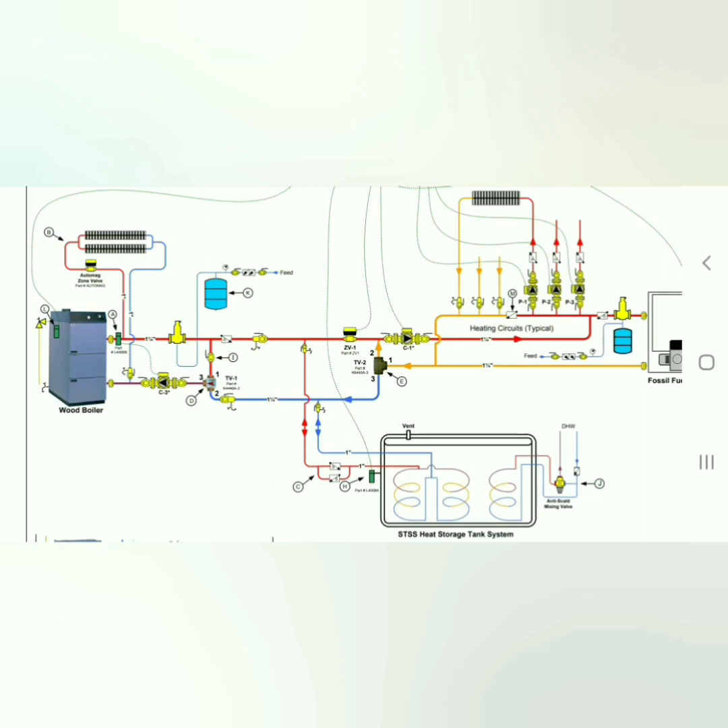Essentially, here's the wood boiler, and it has a circulating pump right here. That circulating pump comes on once the water jacket in the boiler reaches 150 degrees, and it'll circulate the water so you don't have uneven heating in the boiler jacket.

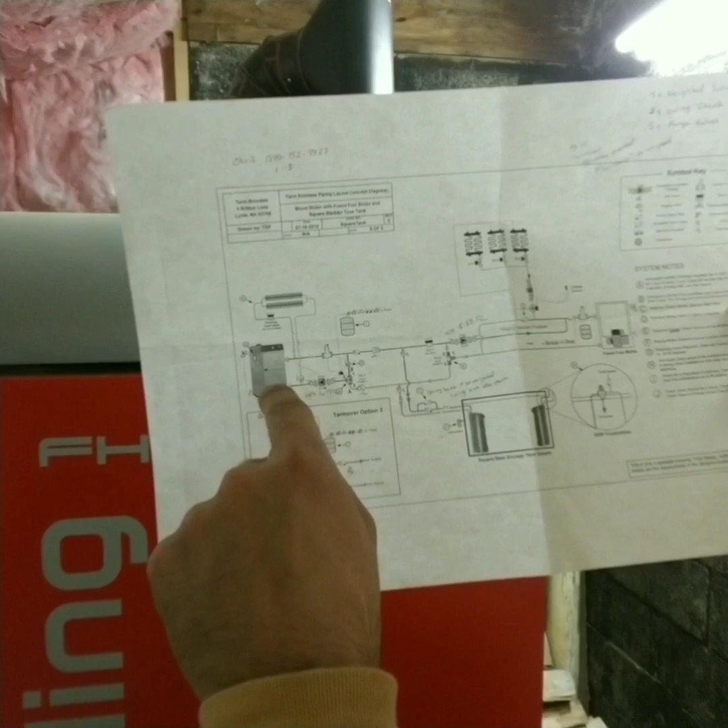That is an emergency dump zone. If you lose power, this valve automatically opens. So if you have a fire going and you lose power and the air vents don't shut, the boiler won't overheat. It has a big enough emergency dump zone that it dissipates all the heat. That's inside the house. I'll show you that later.

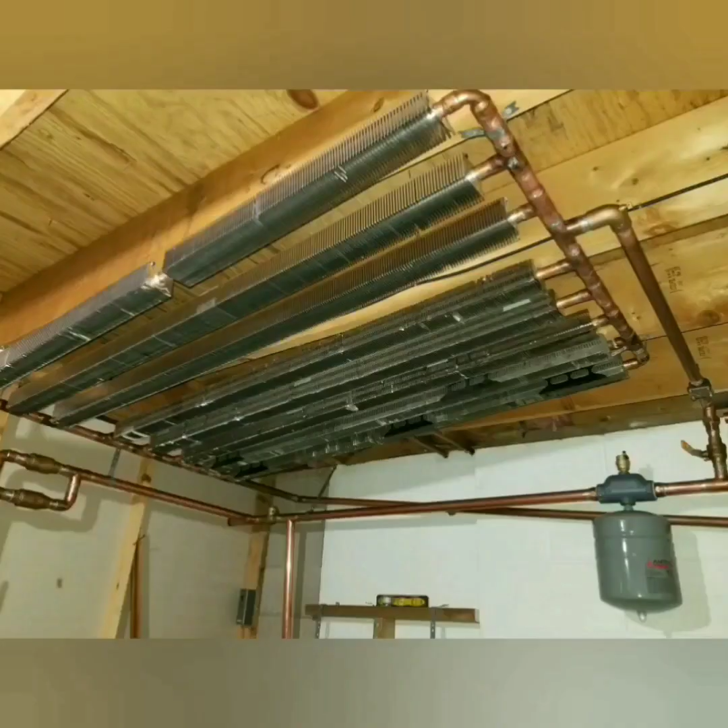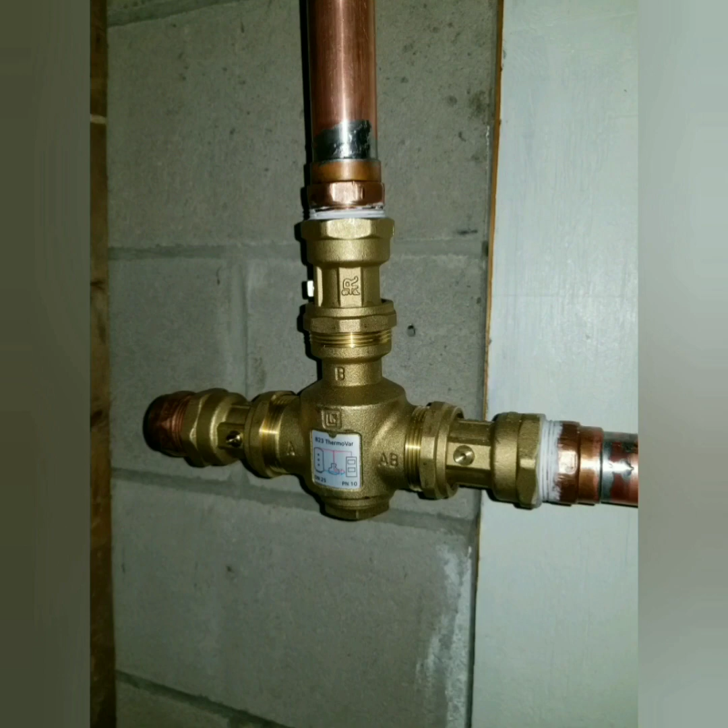So at 150 degrees this pump turns on and it circulates right here through this area. The reason it does that is because this valve right here is like a thermostatic valve, just like the thermostat in your car. It will not open and allow any of the flow to go anywhere but back to the boiler below 150 degrees.

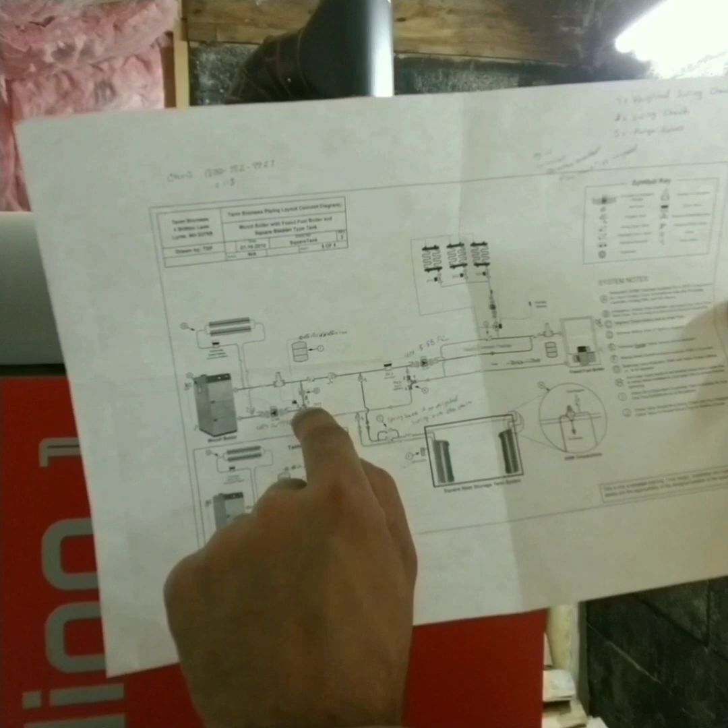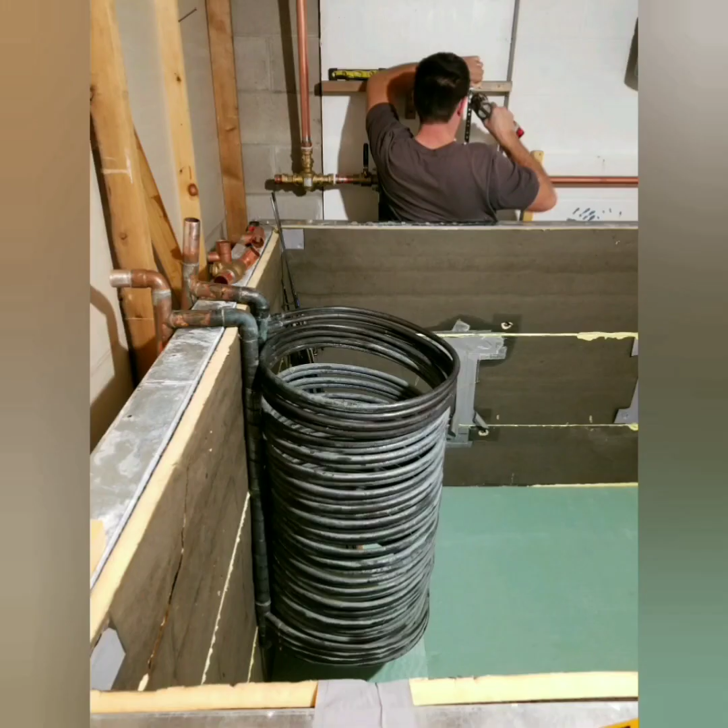Above 150 degrees, this opens. What it does is it shuts off number 1 and opens number 2. So flow from the boiler can now go over here down into this coil, which heats the storage tank. And then the cool water returns back through this valve and into the boiler to get reheated. So that's pretty much the boiler and how the storage tank works and how those two interact.

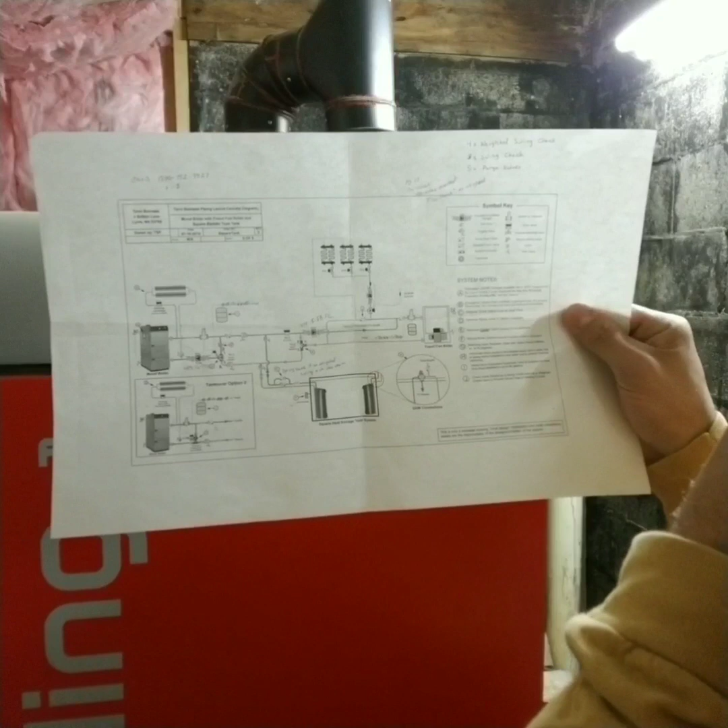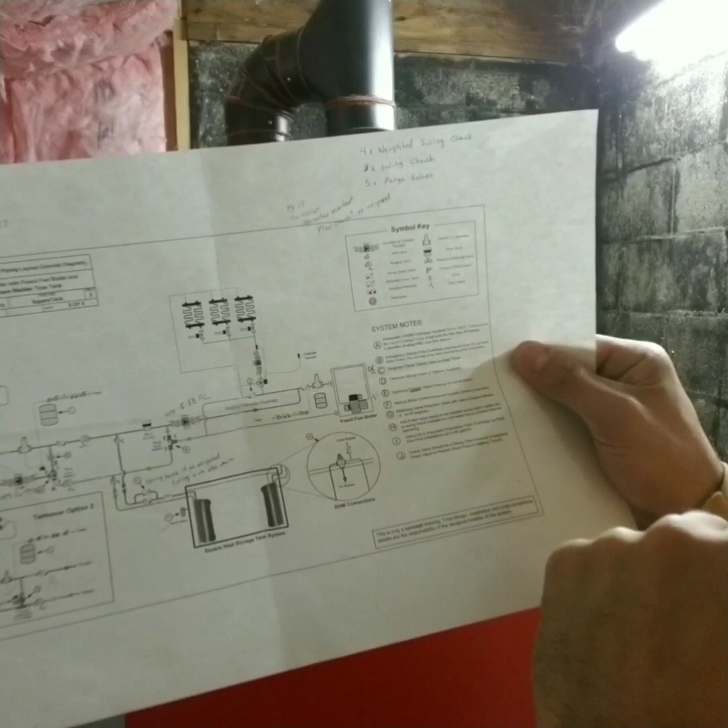Where it gets interesting is when you have a fire, you're charging the tank, and then the normal controls in the system, your thermostat up in the house, like this represents one of your zones, say your kitchen or living room, dining room, one of those areas calls for heat. What happens then is it opens up this zone valve and it turns on this circulator.

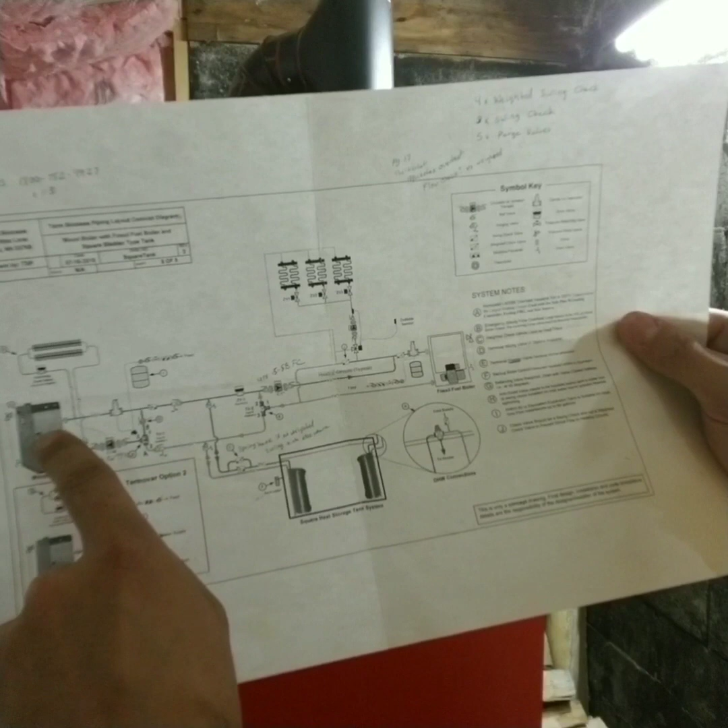Now if your fire is still burning and your water jacket's above 150 degrees, this circulator is still running. So you've got hot water from the boiler now serving whatever demand is in the house. Instead of going back to the tank to charge it, flow is diverted through the zone valve, through this circulating pump, and out to your main header. And then if you have an individual pump for your zone, it pumps the hot water to your zone.

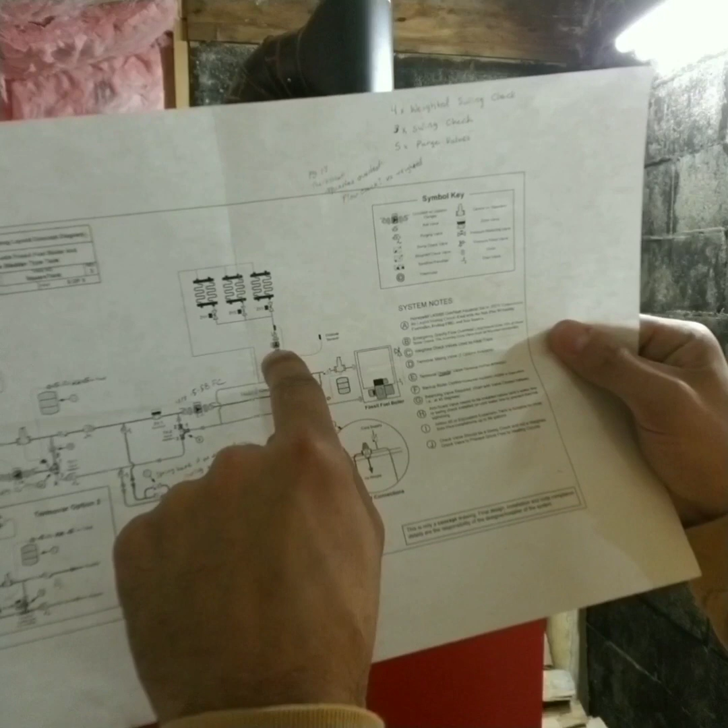Now the boiler's output is around 185 degrees. That's like an ideal baseboard water heat system. If you've got in-floor heating, it's going to be much lower temperature. I'm not going to go into that. So your heat goes out to your loop and it circulates.

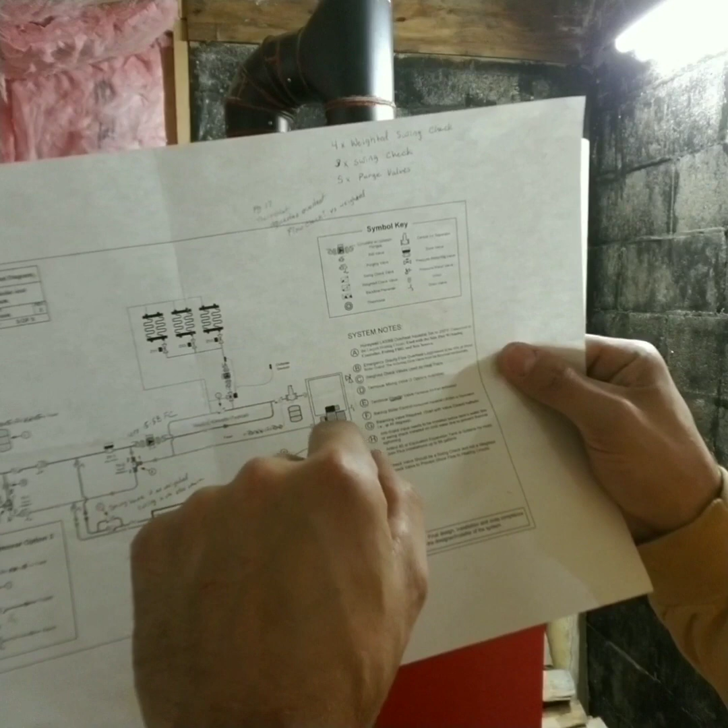The interesting part about this system is after it goes through and gives off the heat, it comes back here. That's a check valve. It can't go back that way. It's forced to come down here. It comes to this valve, which is basically another thermostatic valve.

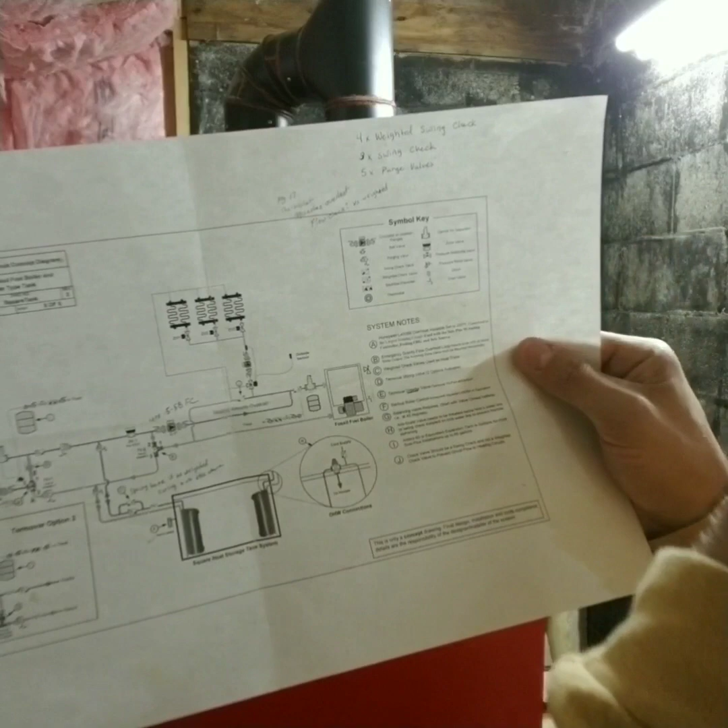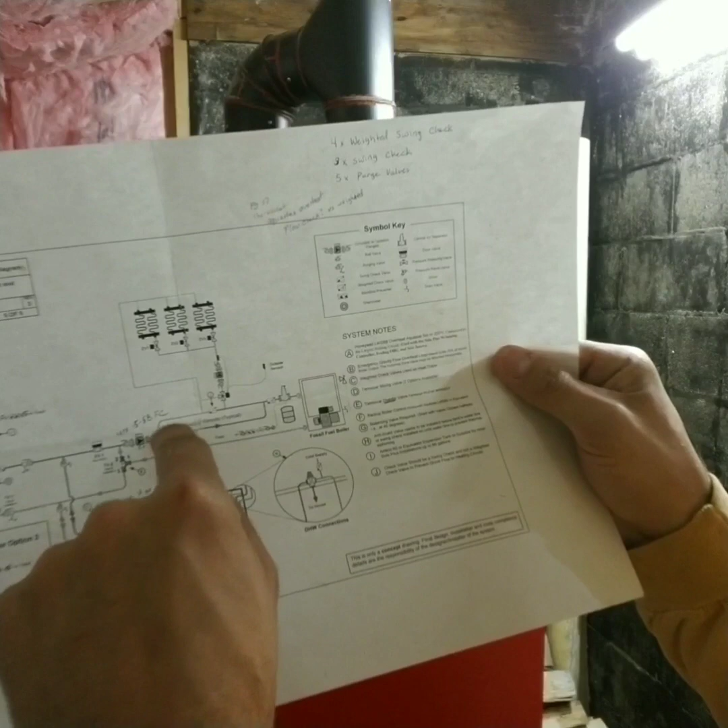For this valve, if the water coming back is above 165 degrees, it gets sent back this way and back around for another ride until it's lost enough heat and it's below 165 degrees. Once it's below 165 degrees coming out of this zone, it comes back to this valve, and it's going to divert it down this way and back to here.

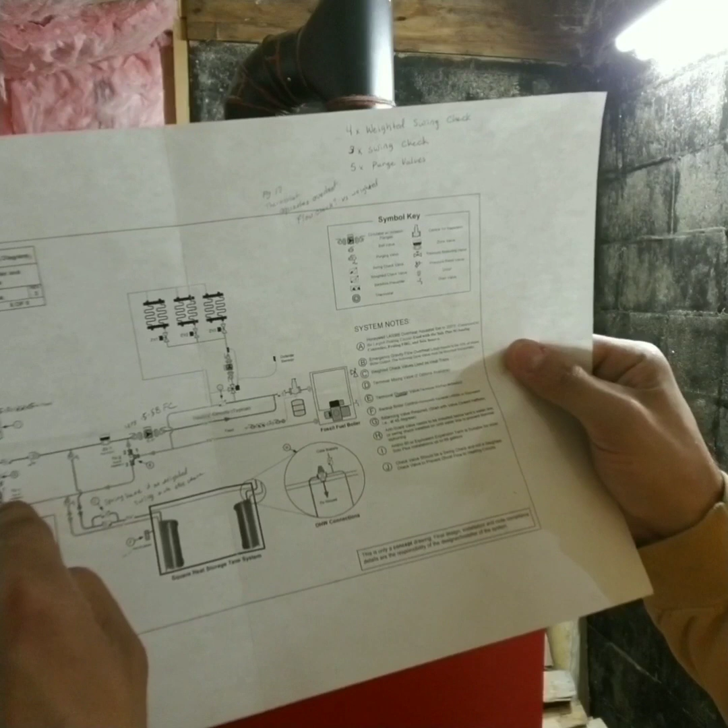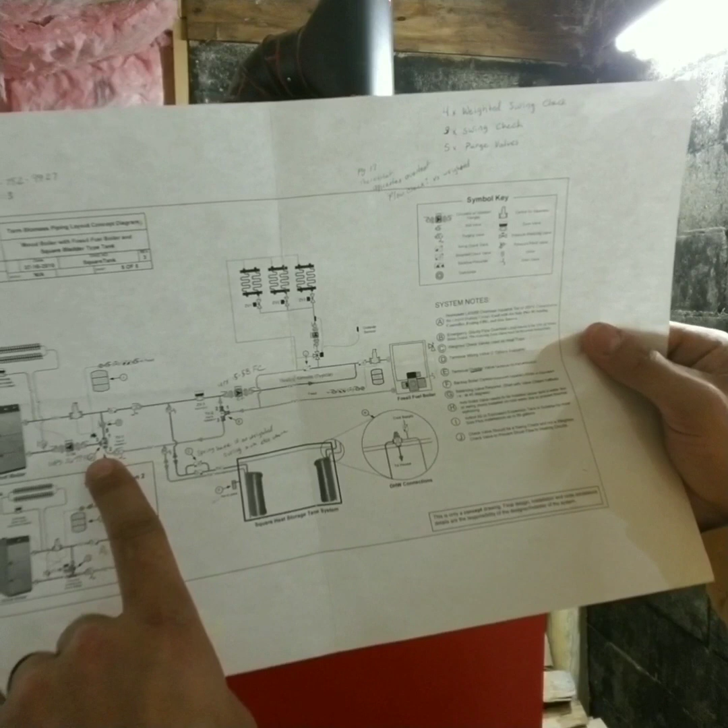And this valve may mix it so you always have 150 degree hot water coming back to your boiler. That's the key part of this valve right here: it's a minimum temperature protection for the boiler. You always have hot water coming back to the boiler at 150 degrees. That prevents creosote and corrosion in the boiler. So that's basically it in a nutshell.

Make sure you're seeing this. Hopefully it comes out well.

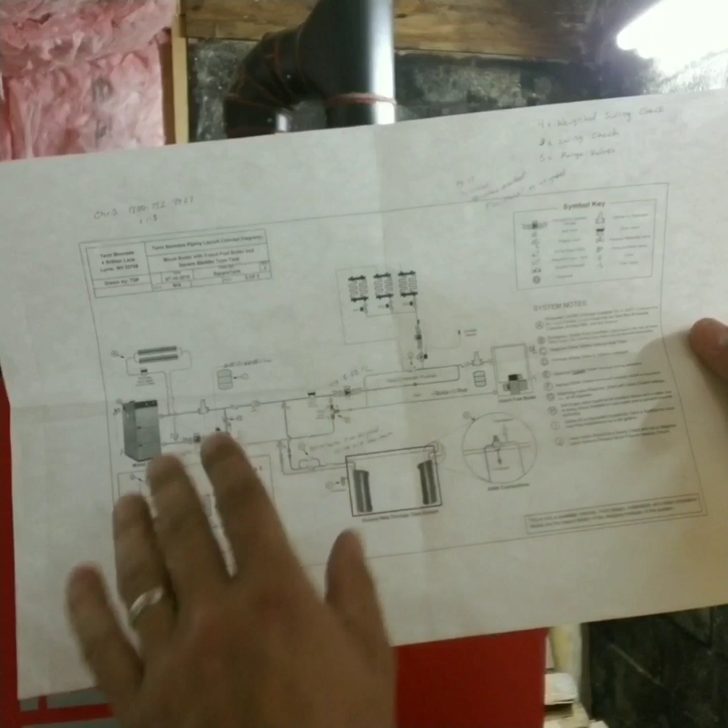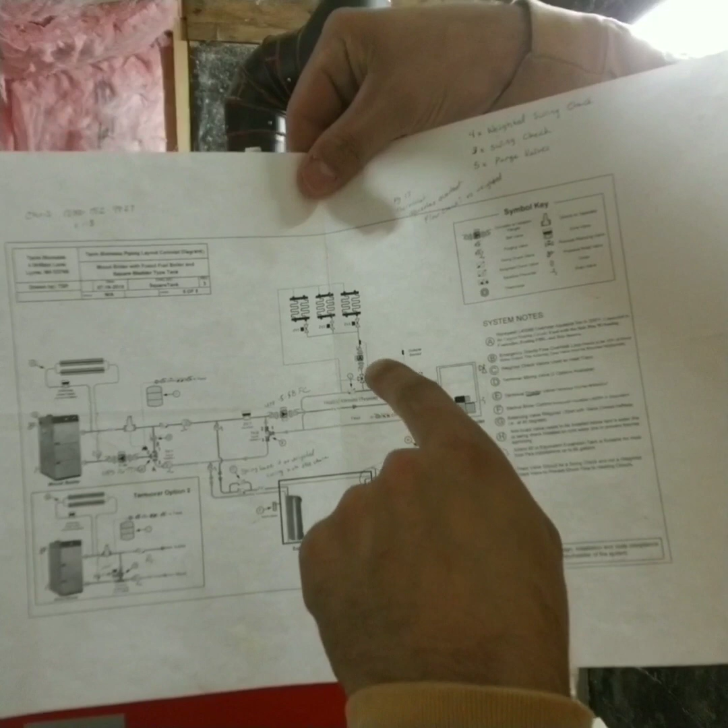So that was the scenario of a fire going in the boiler, a zone calls for heat, and what happens in the controls. The other times the system calls for heat, you may not have a fire going in the boiler. In that case, your zone calls for heat. This pump turns on. This pump turns on.

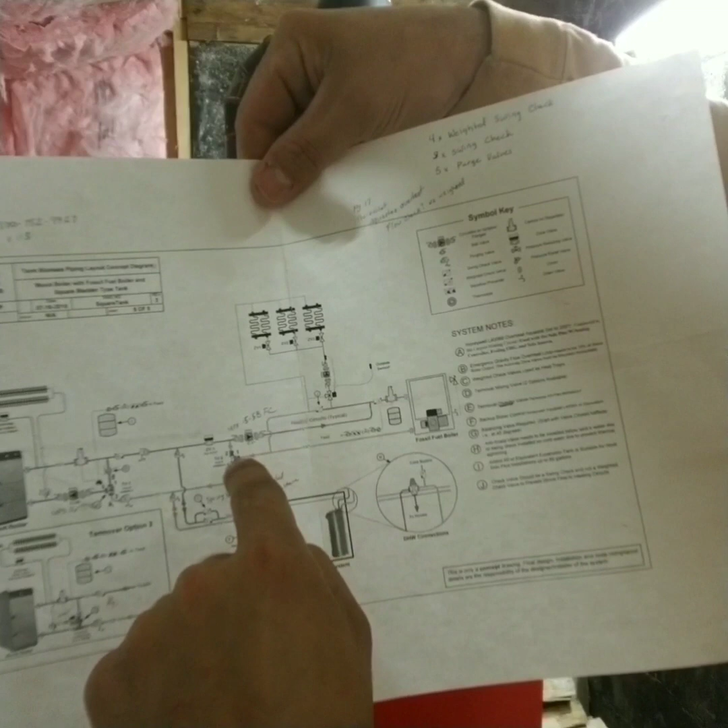Your zone valve opens. And because this pump is not running at the boiler, no water goes back to the boiler. Water comes from your zone through this valve. It's less than 165 degrees. It comes down here. It goes to the tank, goes into that heat exchanger, gets heated back up, comes back up this way through your zone valve, back through that circulator, and out to your zone.

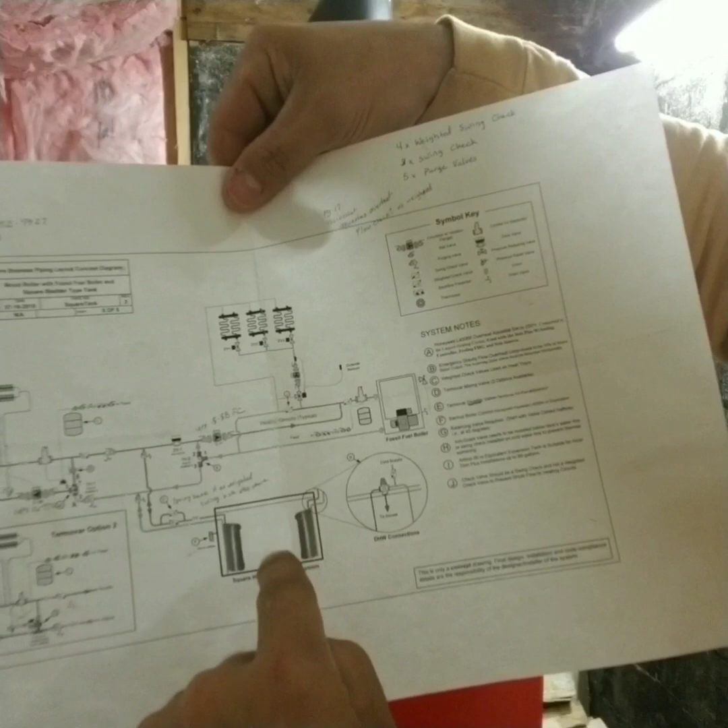So this heat exchanger in the tank works both ways. It heats the water in the storage tank, and it also removes the heat from the storage tank. And it does that because it has two check valves in the one line right there.

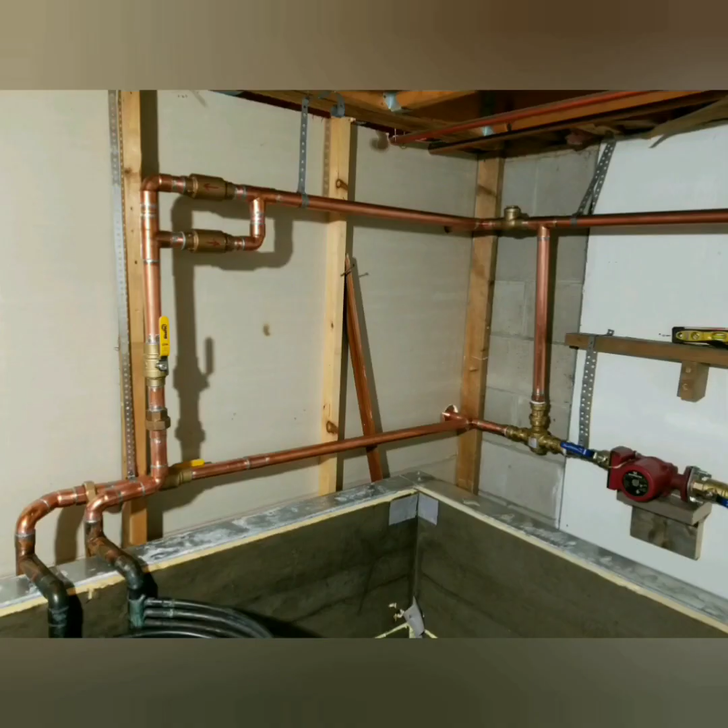I used all 1 1/4 inch copper tubing. The straight copper, even though it's expensive, is dwarfed by the cost of the fittings. Why did I do copper? It was recommended by the boilermaker and everybody else I talked with. You can use PEX, I'm sure you can. I don't know what the upper temperature rating is of PEX, but copper doesn't lose its value. And in my opinion, it's a longer-lasting, better, reliable product. So I did everything in copper.

I'm getting ready to fire this boiler. I'll give you a quick rundown on the lighting process and demonstrate how easy it is to use. There are other gasification boilers that boast a pretty good efficiency rating. It's my opinion this is one of the best, top two. And the one thing that makes this, in my opinion, the best boiler is the user interface and how easy it is to use. When I purchased this boiler, one of the major factors was ease of use.

I need something where my wife's not intimidated to come down here and light the boiler and heat the house. I also want something that's efficient and easy to use. It's primarily two things. Of course, budget's always in there, so everybody's budget's different. So, that being said, I'll load it, I'll start it, I'll show you how easy it is. I'm going to show you some of the controls, and we'll go from there.

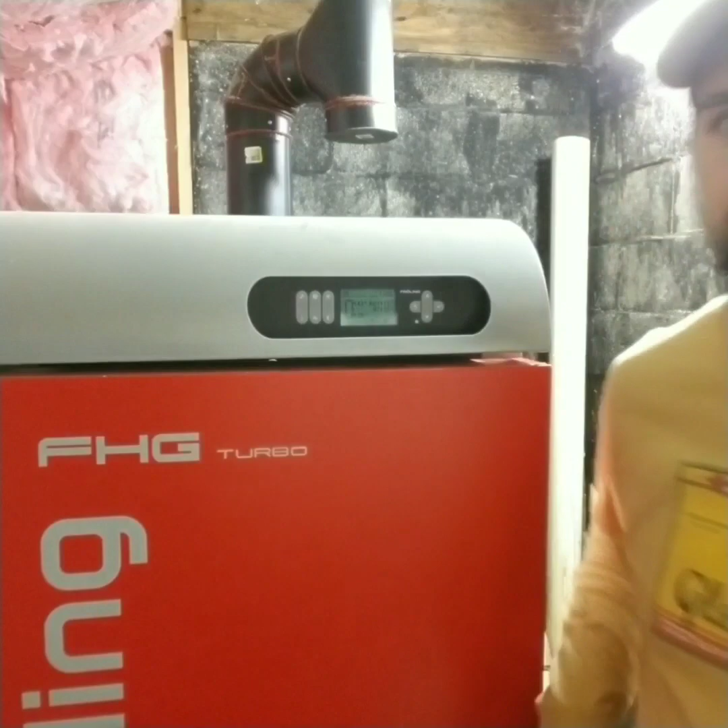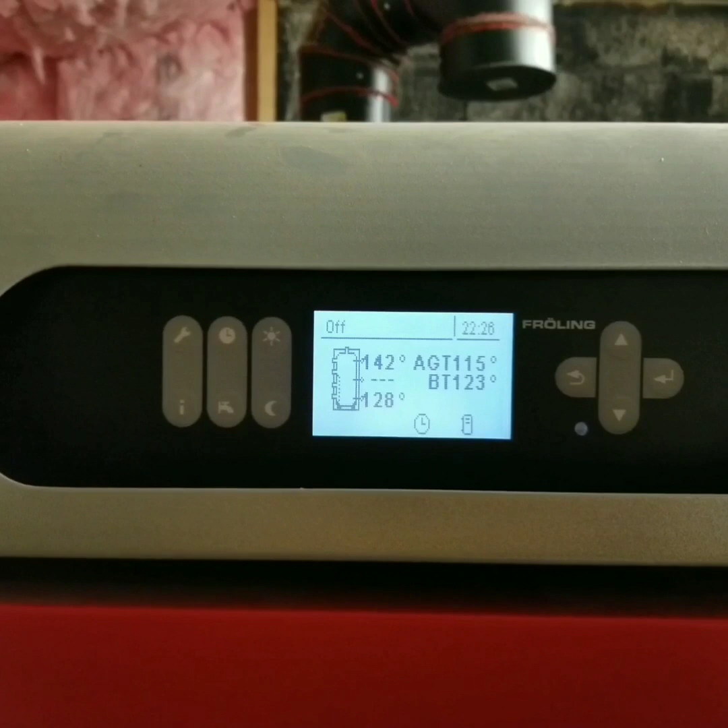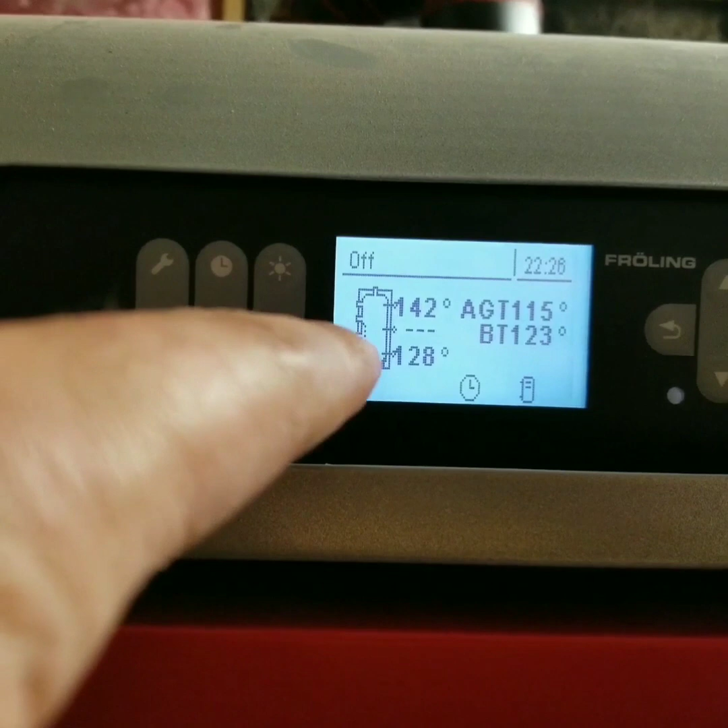Okay guys, this is the control panel on the Froling FHG. This boiler's got 105,000, I believe, BTU per hour output. On the control panel, you'll see a couple of numbers. The ones on the left are the storage tank. You can see the upper tank temperature is 142 degrees. The lower temperature is 128.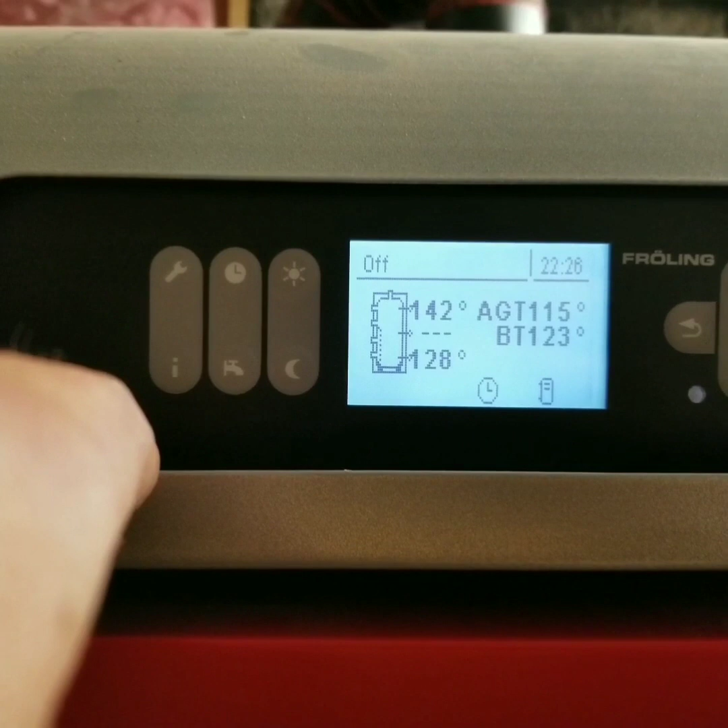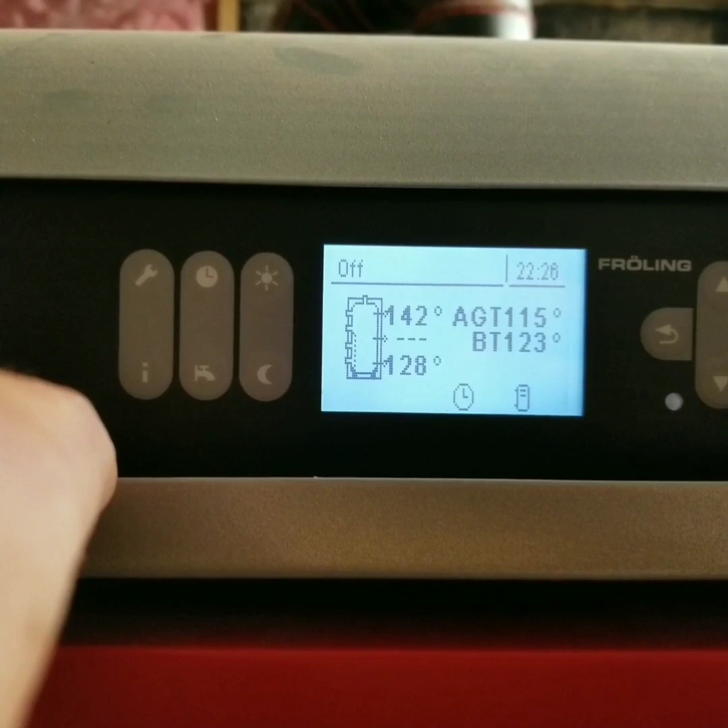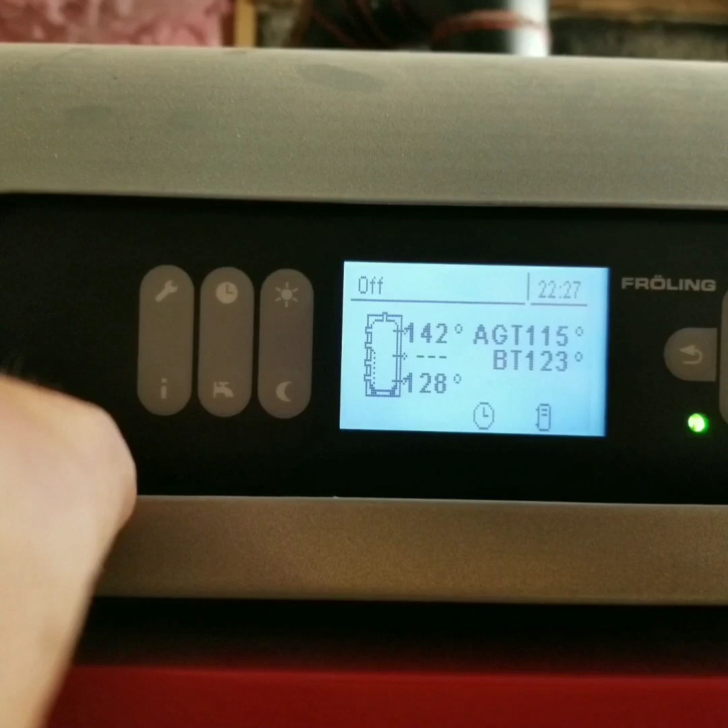In the worst parts of winter, I try to recharge the storage tank when it hits about 150, 155. And that's primarily because your baseboard heaters, the emitters, are a copper tube with aluminum foil fins on them. They really start to lose a lot of efficiency below 160 degrees. If it's 10 degrees below zero outside with a 5-mile-an-hour wind, 150 degrees is going to be about your bare minimum. If you've got in-floor heating, PEX, or in concrete or what have you, your lowest usable temperature in your storage tank is going to be much lower. In-floor heating is usually sending around 110, 120 degrees out through your floor.

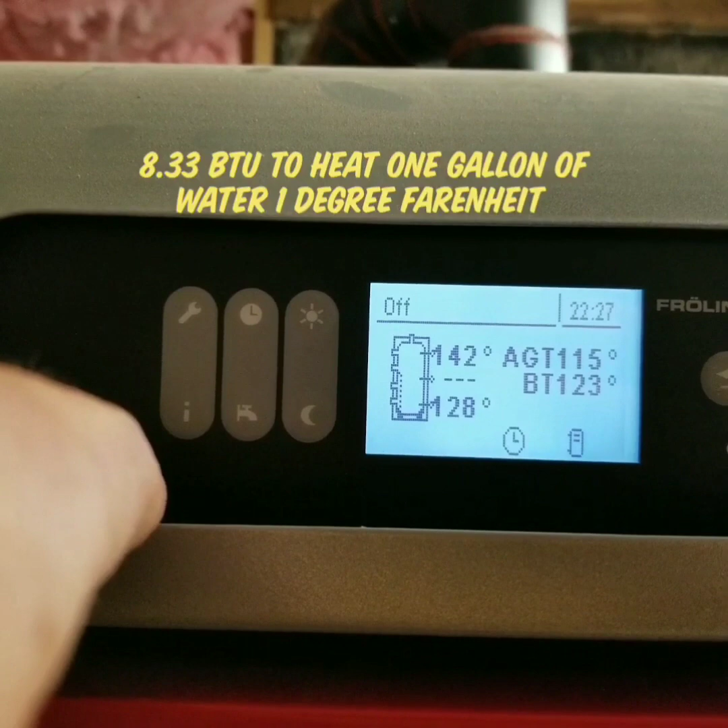So if you think about it, my max temperature is 180 in my storage tank, and I recharge it at, let's say, 140. That's an even 40 degrees. 40 degrees of differential temperature over 820 gallons. I could do the math and show you what that looks like in BTUs. And then let's say you use that over a 12-hour period. Now you know how many BTUs per hour my house would use.

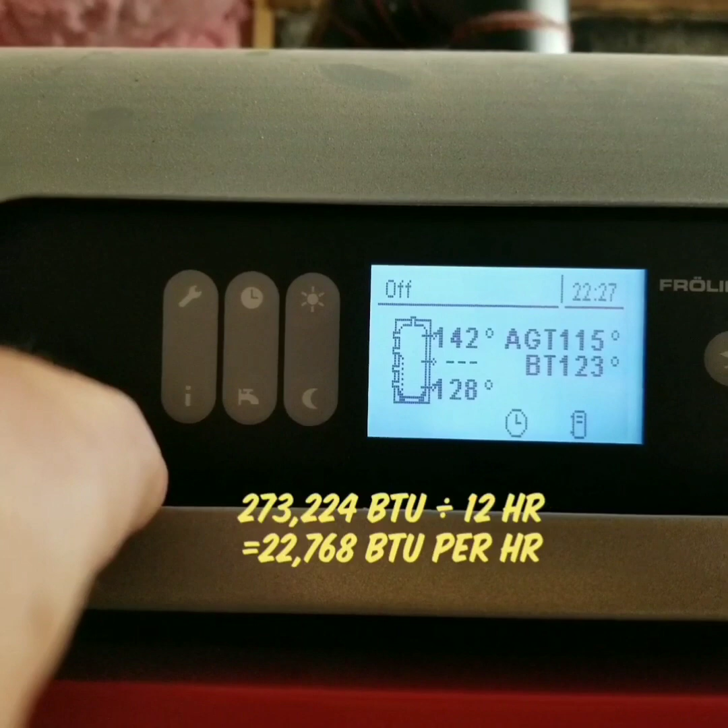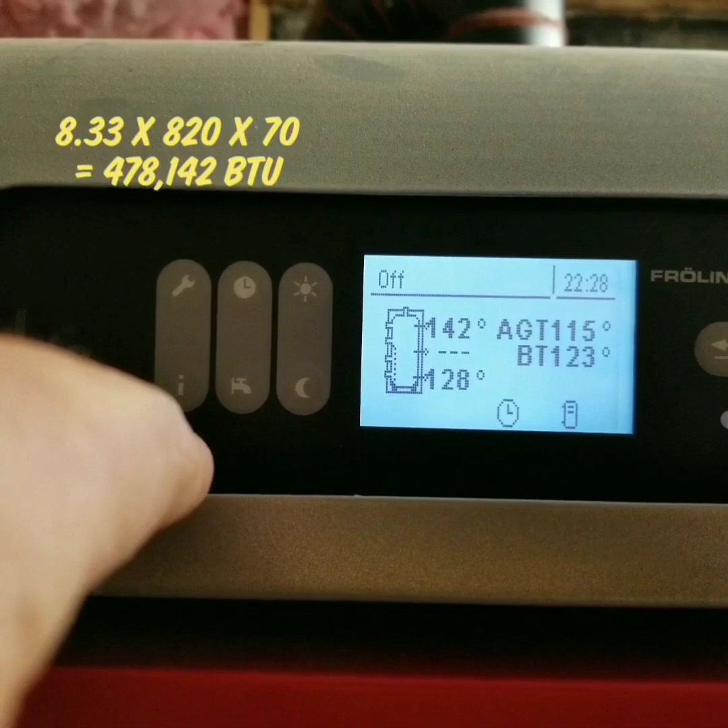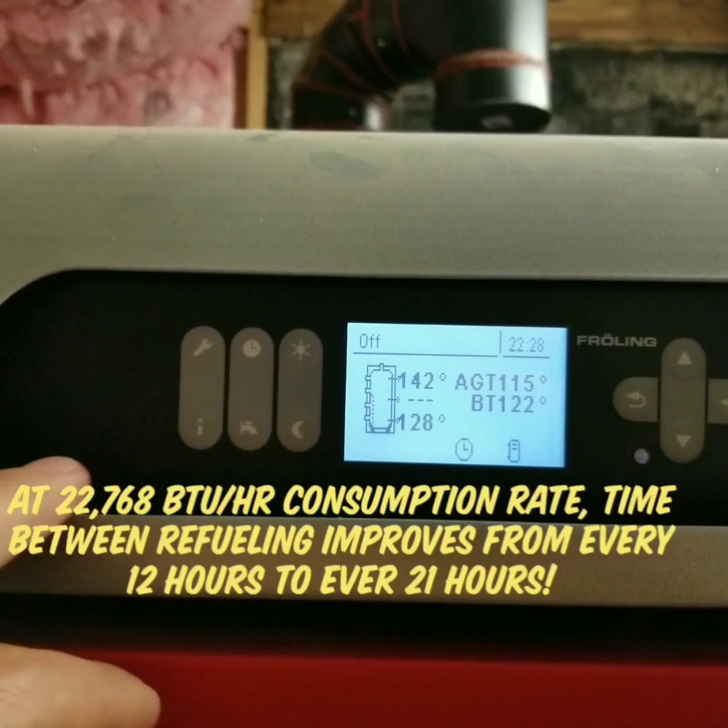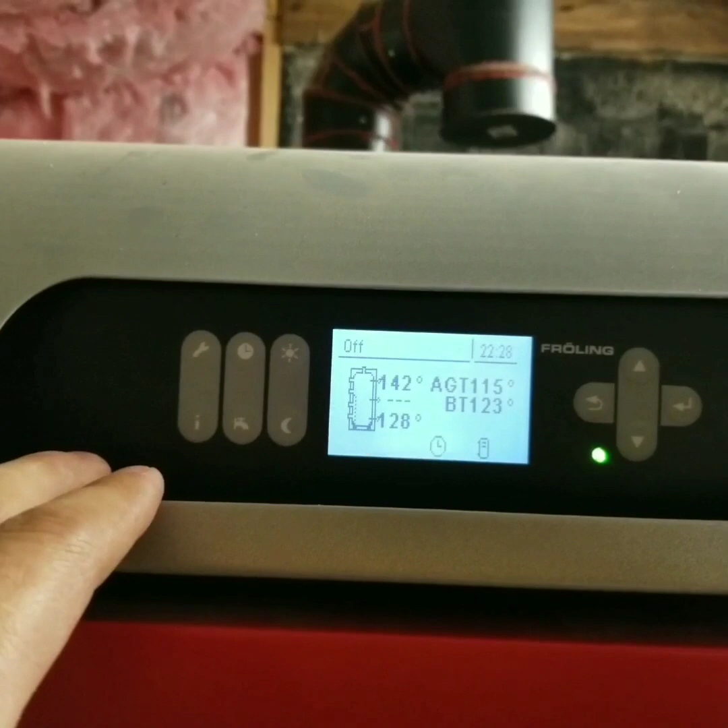If you've got in-floor heating and you can draw this tank temperature down to 120, 110 degrees, you just picked up 30 more degrees of differential temperature over that same volume. You've basically doubled your heat storage. So for you guys that have in-floor heating and you're thinking about doing a boiler, definitely consider one with a storage tank. Doesn't have to be this boiler, but a gasification, what they call batch burn boilers, and you'd be surprised how long you could actually go without reheating.

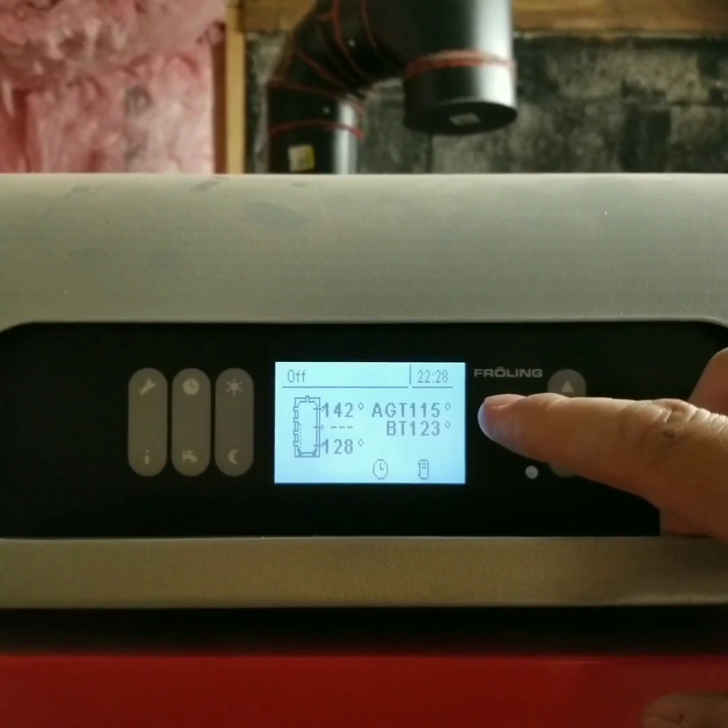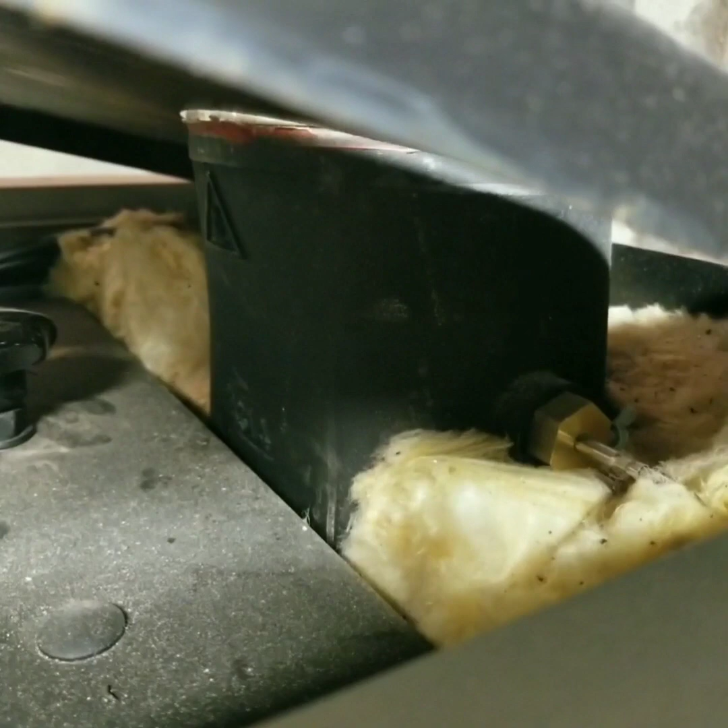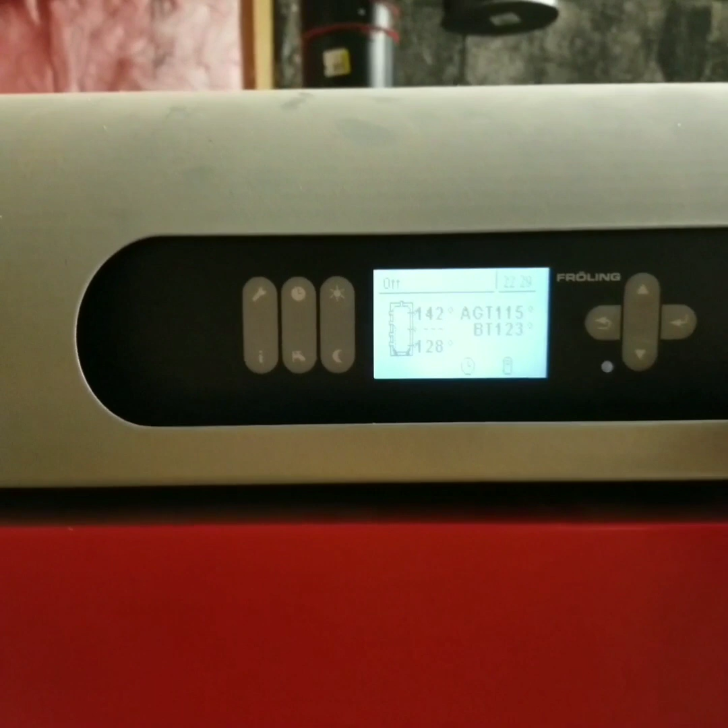All right, enough rambling. The number in the top right, AGT, average gas temperature. So there's a temperature element in the flue for the chimney. Can't really see it. Okay, that little brass plug right there, that's the temperature probe. There's also an O2 sensor, just like your car has, and it's measuring the residual oxygen, and it's adjusting the air dampers to meet whatever program criteria it needs for optimum burn.

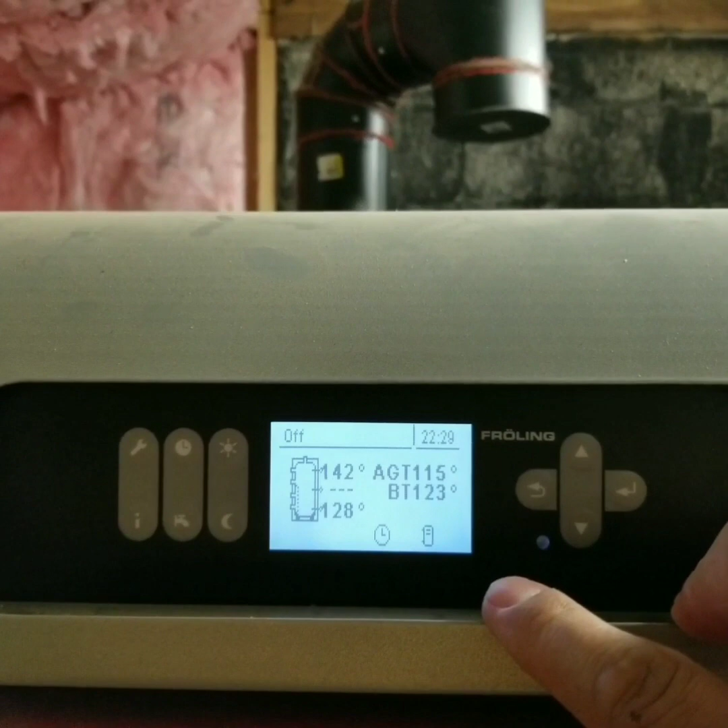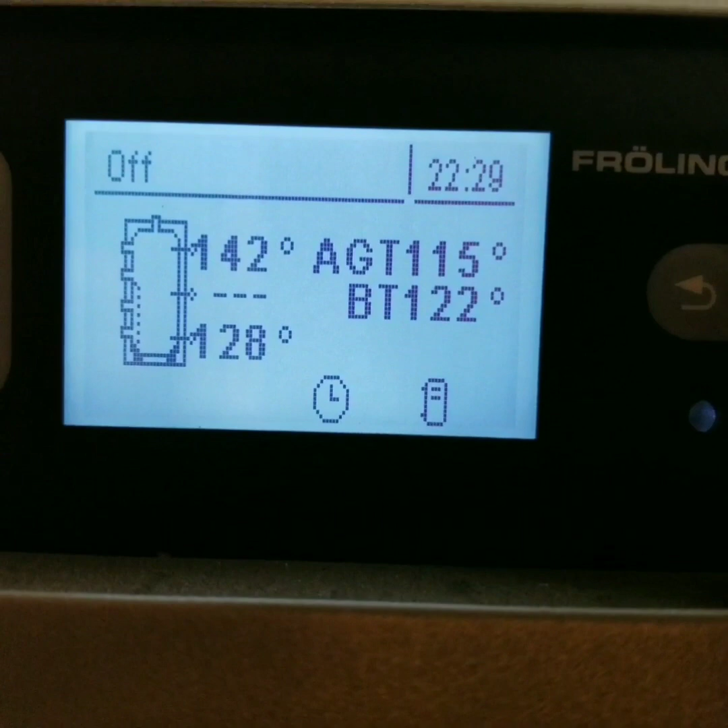The lower temperature is your boiler jacket water temperature at 123 degrees. Interesting thing about this boiler is that little thing right there represents the storage tank, and it's telling me it's approximately half full of energy. Now the other unique thing about this boiler is it has the ability to calculate, based on your storage tank size and what the temperatures are in the tank, how much wood you should load in this boiler. Of course, those numbers are based on the storage tank the company designs to complement this boiler. If you're using a storage tank other than what they sell, your numbers are just going to be an estimate.

But really, it's like any other machine or wood stove for that matter. You kind of get the hang of reading the tank temperatures, looking at the weather, gauging how much wood you need to load in it for the day, and you can just look at the temperatures and know you don't really need that calculation to tell you how much wood. But it's on there, so it does help a little bit because it's pretty consistent day to day, depending on the weather, how much you're going to load. If it's really cold outside and your house has got a high demand, you can get away with adding a little more wood into the stove because ultimately the house is going to take some of that heat during the recharging of your storage tank.

So you can tend to put a little more wood in there. But you don't want to go too much because it'll put the machine into slumber mode, which is kind of like a smolder mode, so to speak. It's going to keep the wood burning, but it's going to choke the air off. You're just going to waste fuel. You can create creosote, but ideally your wood's dry, 20%-ish, 20-24%, and you're not going to see much creosote. So I haven't seen any with mine.

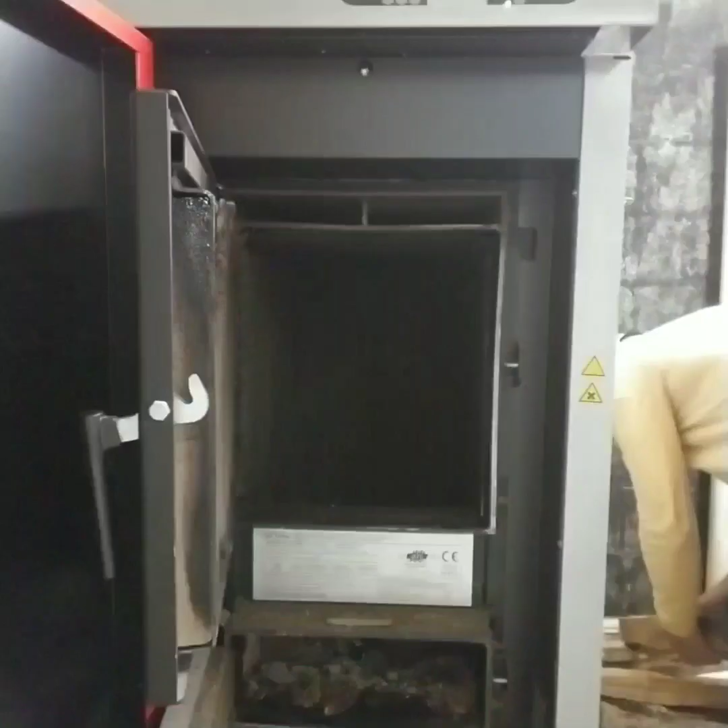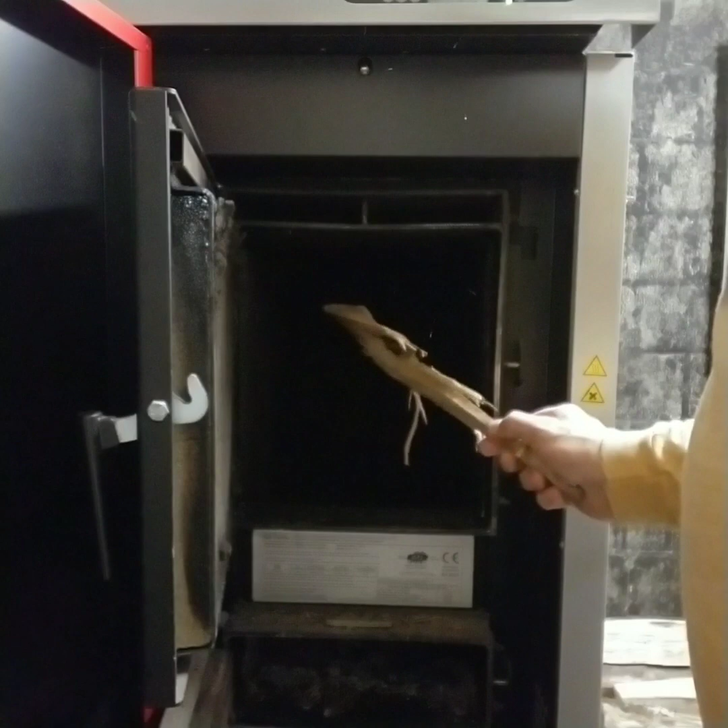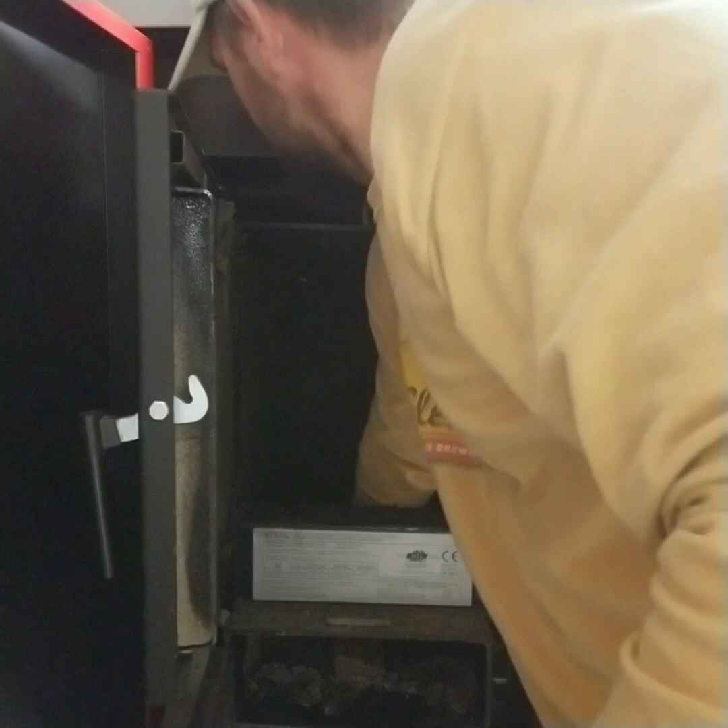Okay, so what I'd like to do is put a couple pieces in there, just on the edges, and then get a small piece and lay it across that nozzle, so that way nothing drops down and blocks the nozzle. But also something small and dry that will catch easy and burn away. And then from there, just fill it in with something a little bit bigger. Got to give it plenty of airspace.

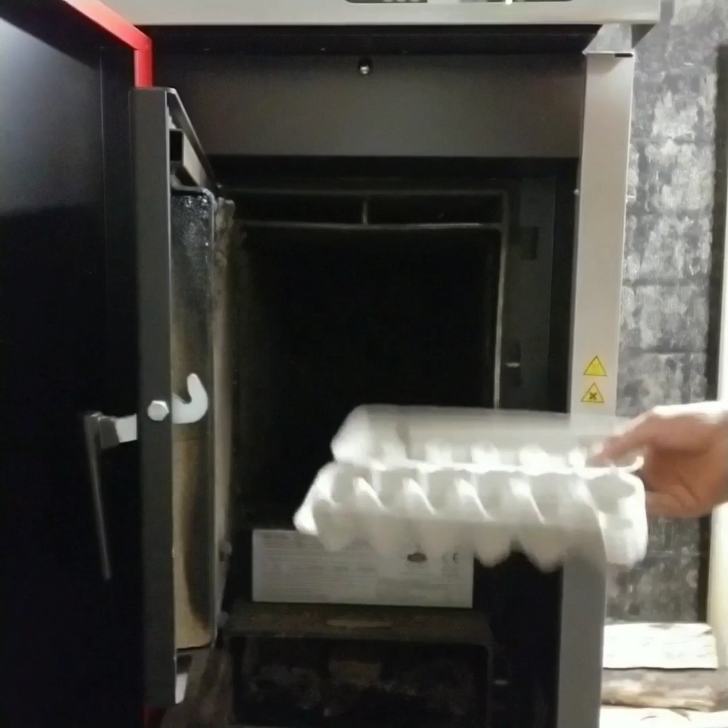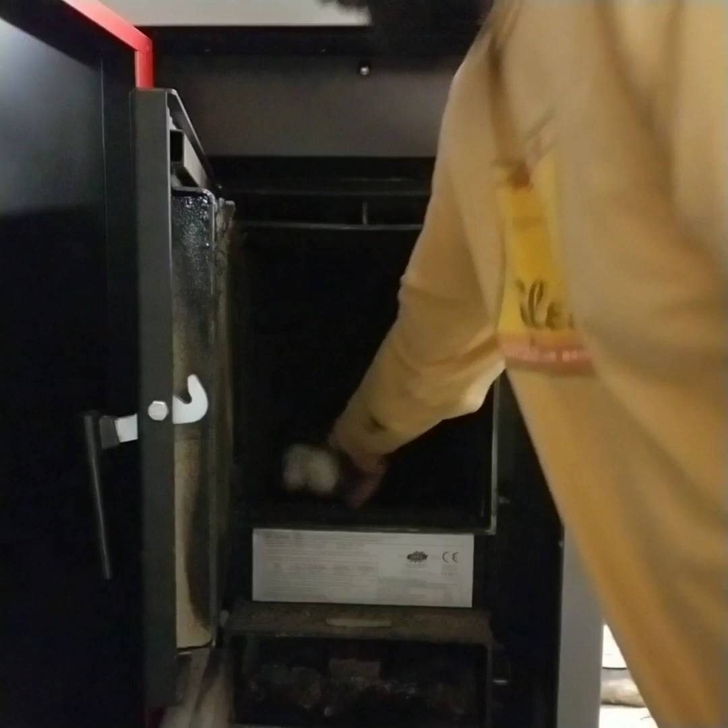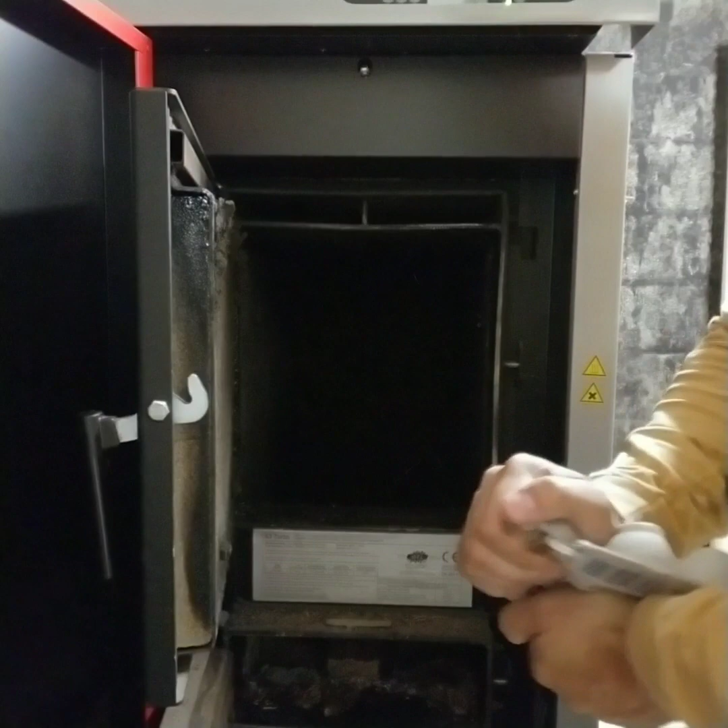And what I like to use for starter material is paper egg cartons. Paper egg cartons, not quite like cardboard, but they hang around and burn. I like to crush them. Stick one in there, both sides of that nozzle. Probably only need one of them, but we eat enough eggs. I can't get rid of them fast enough. Put 2 of those in there and then load it up.

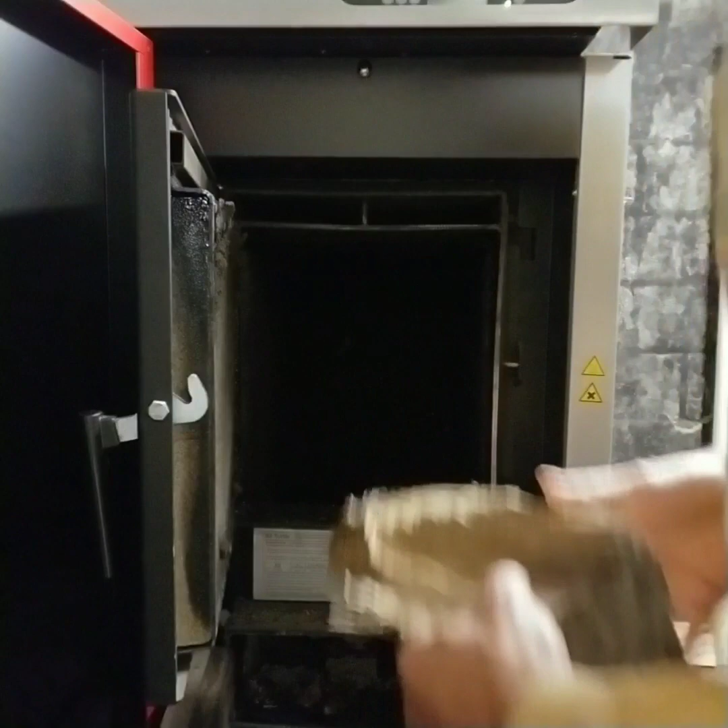Now, after we start the fire, you'll leave the lighting door open slightly, and you just watch for the gas temperature to climb up with the door cracked. I usually close the lighting door when the gas temperature reaches, I don't know, 210 degrees, boiling. There's no rhyme or reason.

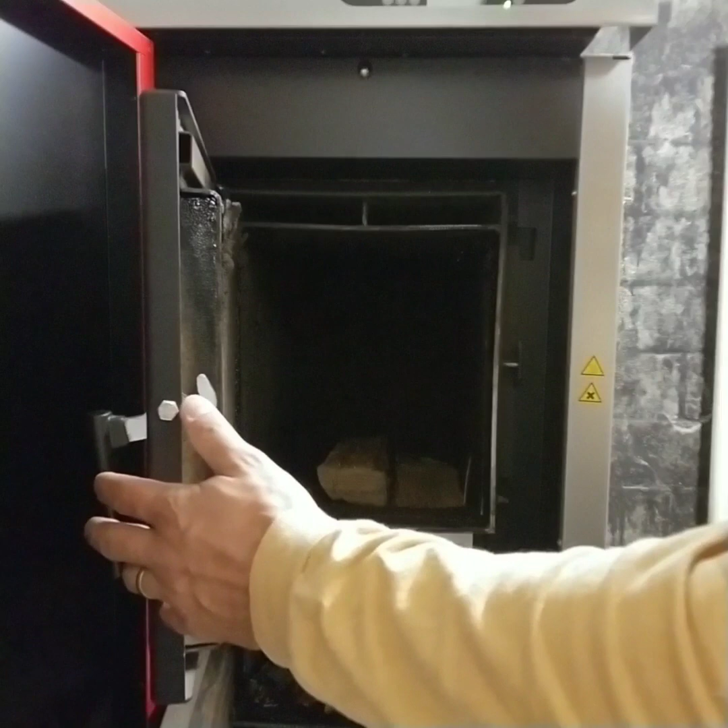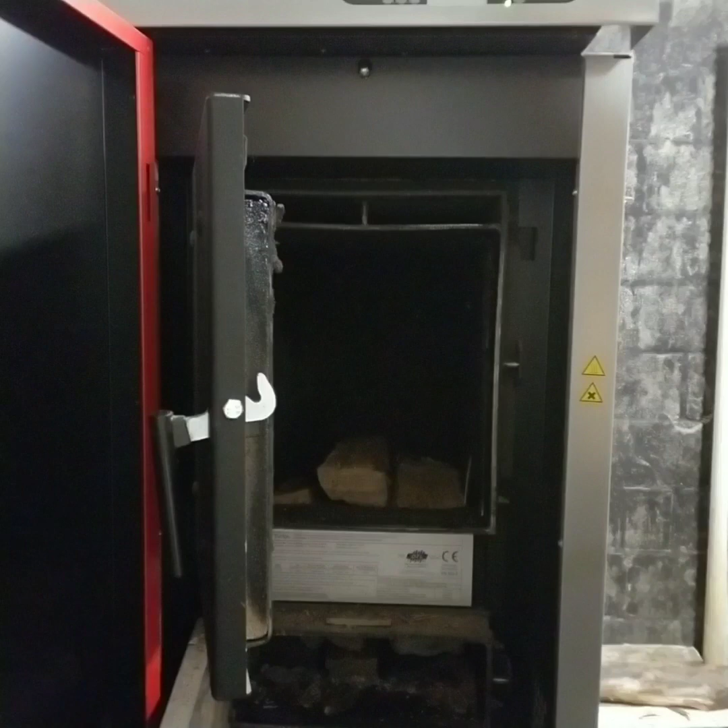It's just what I like to do. When the boiler has a water jacket that's 150 degrees or thereabouts, you can shut the boiler a lot sooner than if the boiler temperature was like 100 degrees or less, because the colder the water jacket is, it's gonna take a lot of heat out of that fire. So I'm pretty good right there.

This is what I would call half load. It's really a little bit less than half. Something that is at the bottom of this plate right here, I consider a little less than half. The pin on the door, I consider that 3/4 full, and this would be full. So if it's telling me 14 kilograms of wood, to me that's like a half load. I probably got one too many in there. I don't want to put too much in there. I'd rather undershoot and have the tank charge only up to maybe 170 degrees instead of max 180 degrees and it go into slumber mode.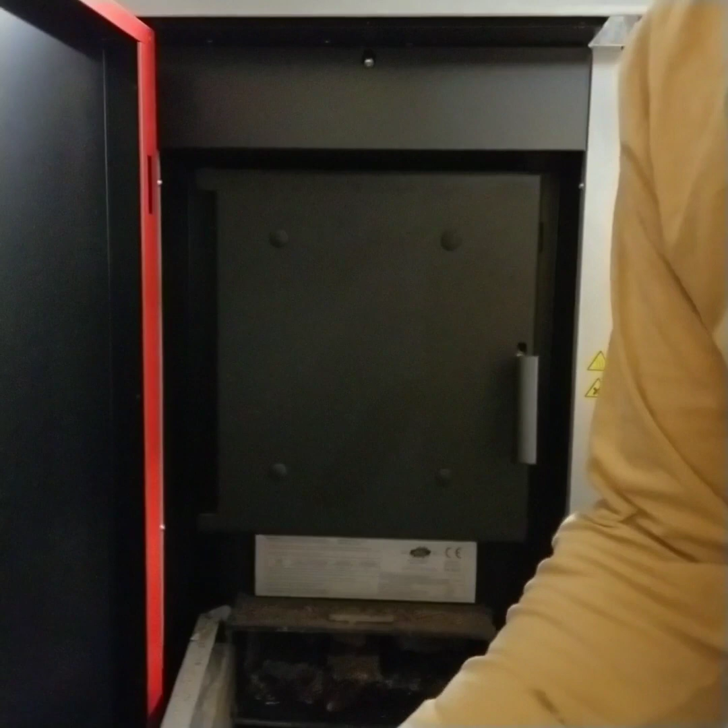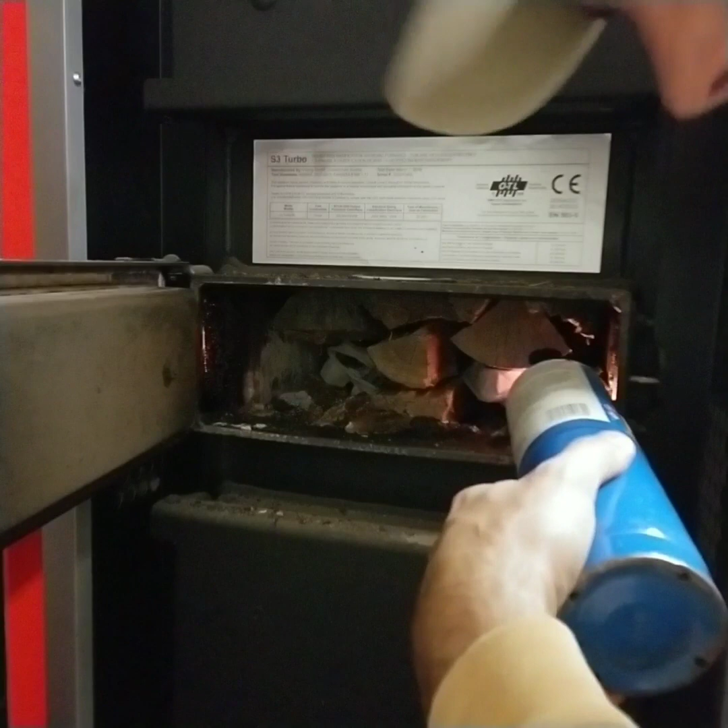Okay, so we're gonna light it. Okay, just turn the fan on. Now I use a simple torch just to light my fire in there. Gives me a nice little reach. And this can is just about due to be replaced. I think it's lasted probably 2 years.

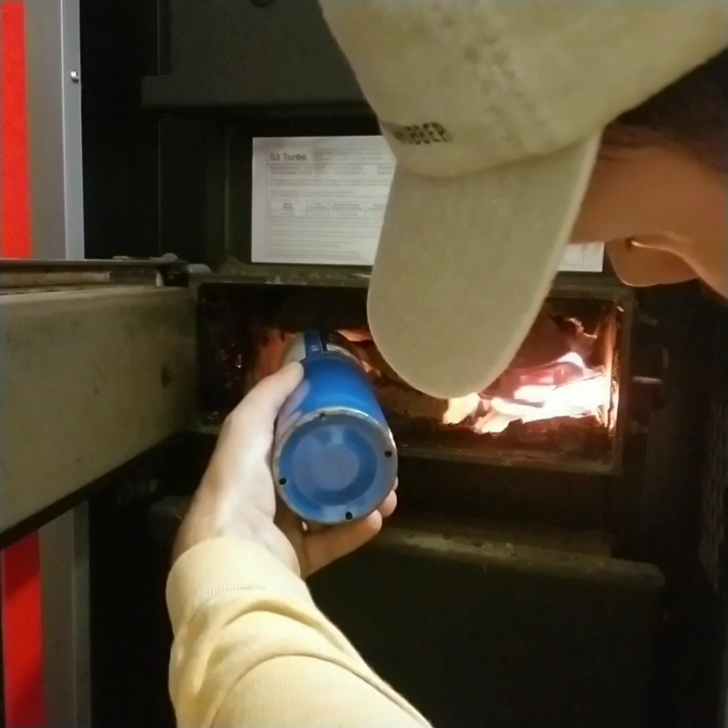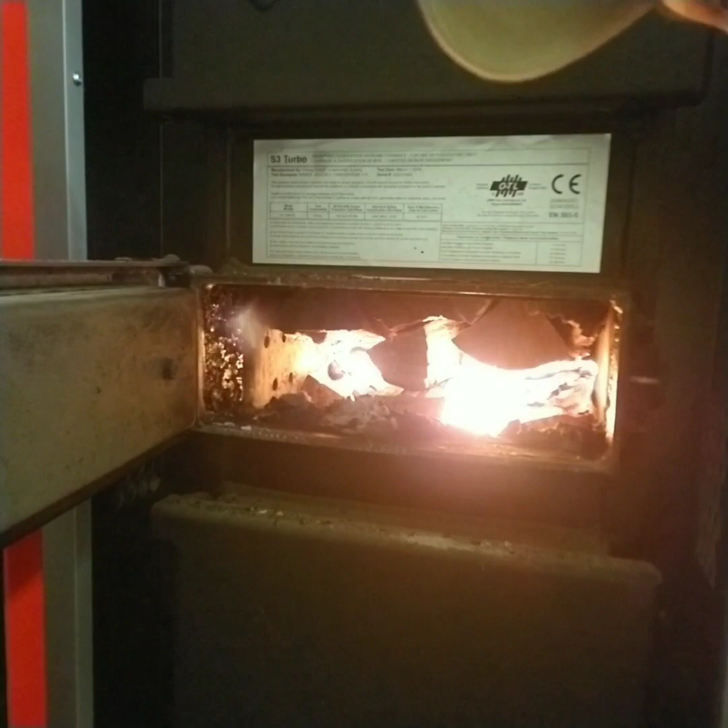Okay. You see it pull that flame right down to that nozzle. There, let's get you in there. That's pretty much it. Then as the wood burns down, it just falls down on itself over that nozzle and keeps burning. Alright, we're going to close this lighting door some now.

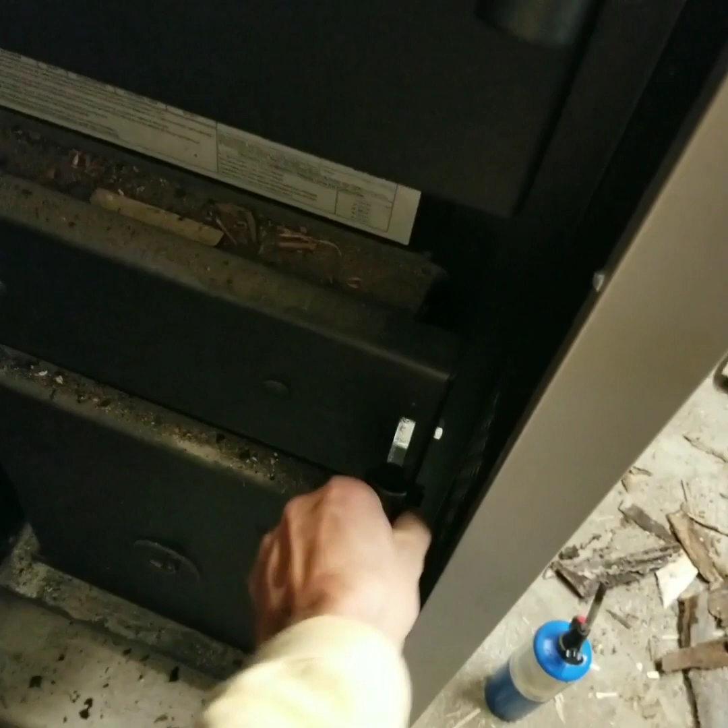Let's check our flue temperature. So I'm already at 240 degrees. This door can get shut. Once that's shut, you should see a pretty good jump in the temperature. It'll start climbing pretty good.

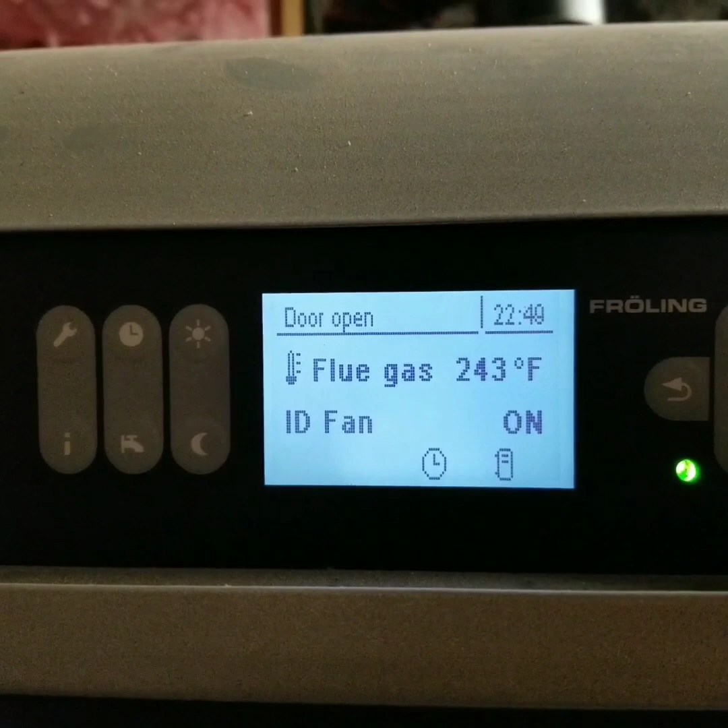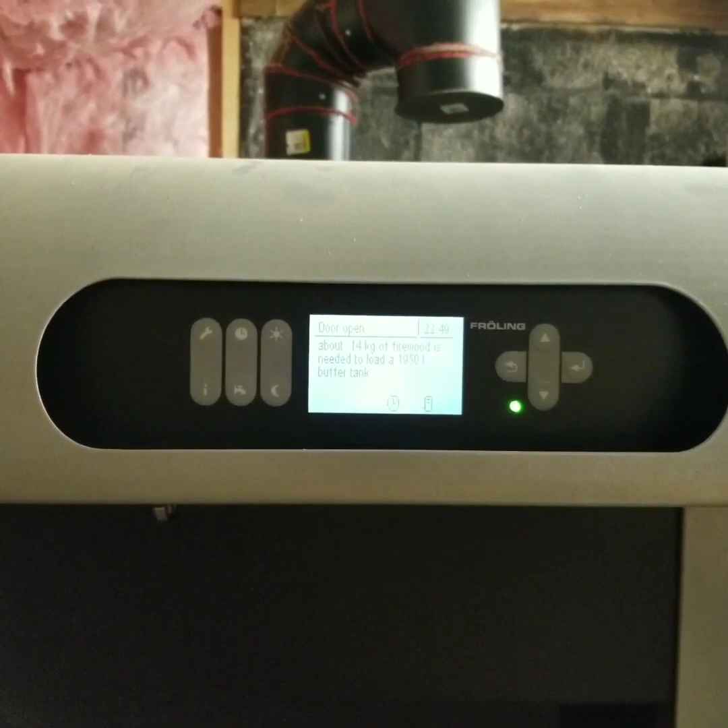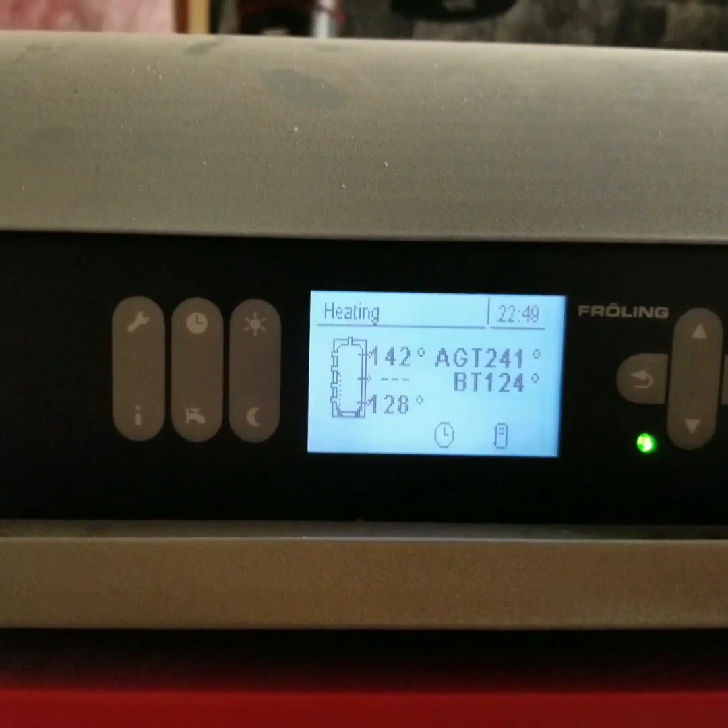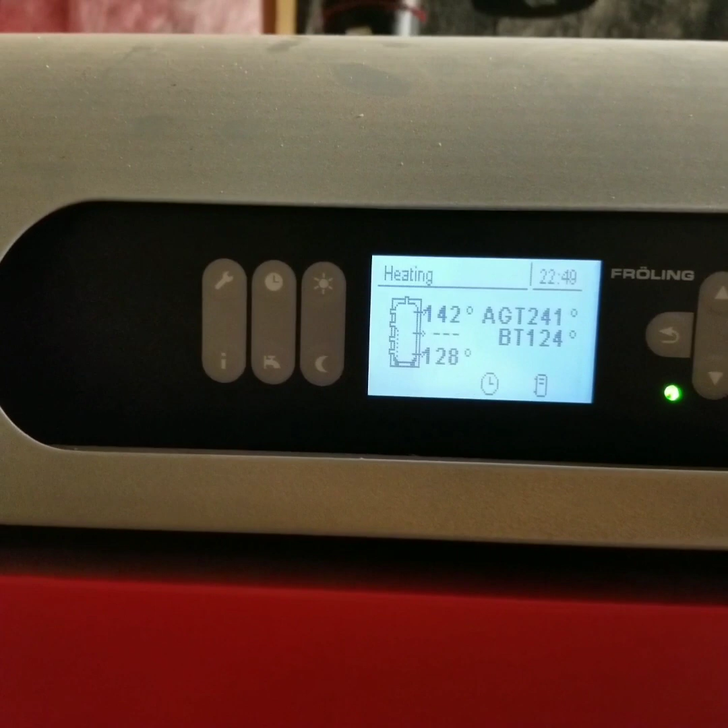Now, as long as this main red door is open, the flue fan, exhaust fan, runs at 100%. It kind of teeters. Let's shut the main door. Now that fan just kicks down to 85%. That's like the maximum running speed with the door shut. It only goes to 100% when you open up the main red door here. It's trying to clear the firebox of any gas. So anyway, that's pretty much it.

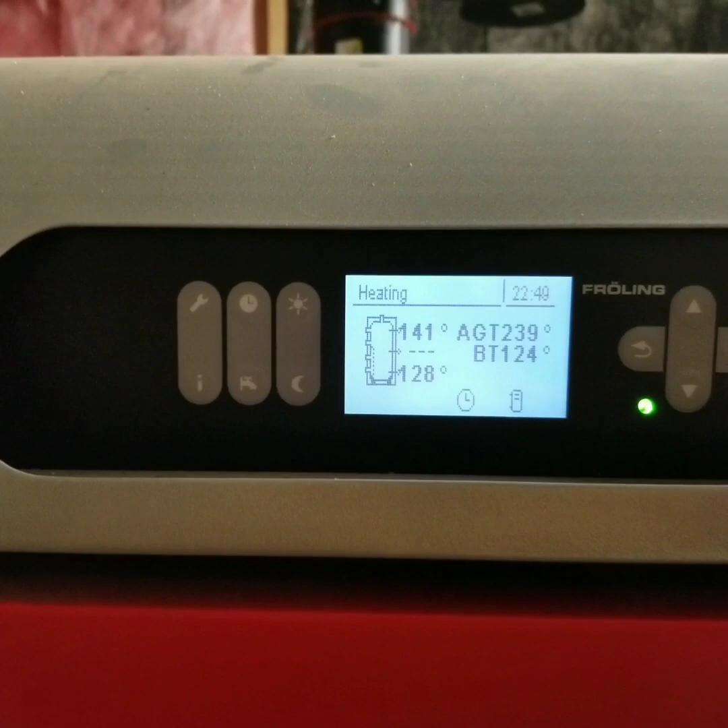Alright guys, that's the Fröling.